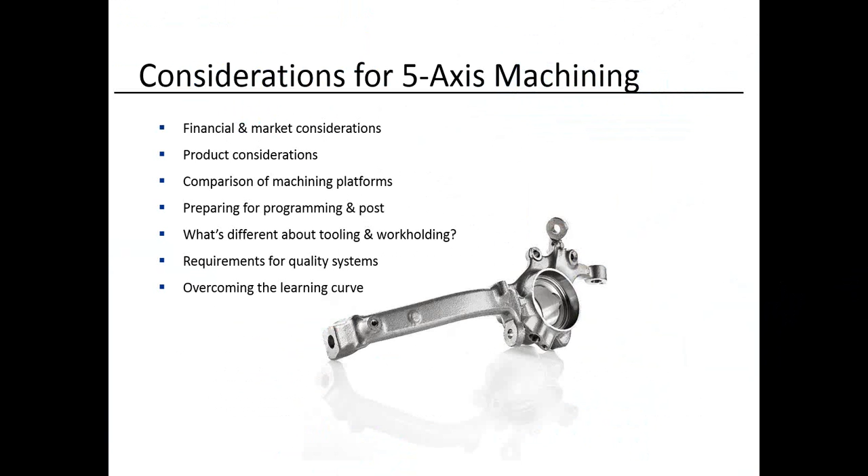Market considerations include the opportunity to diversify into a growing industry segment like aerospace and medical, with the ability to manufacture those in-demand components. Would expertise in 5-axis machining allow your shop to get more work from existing customers, find new customers in the same work segments, or diversify into new contract segments? The business case for investing in new technology should be carefully considered. Next slide, please.

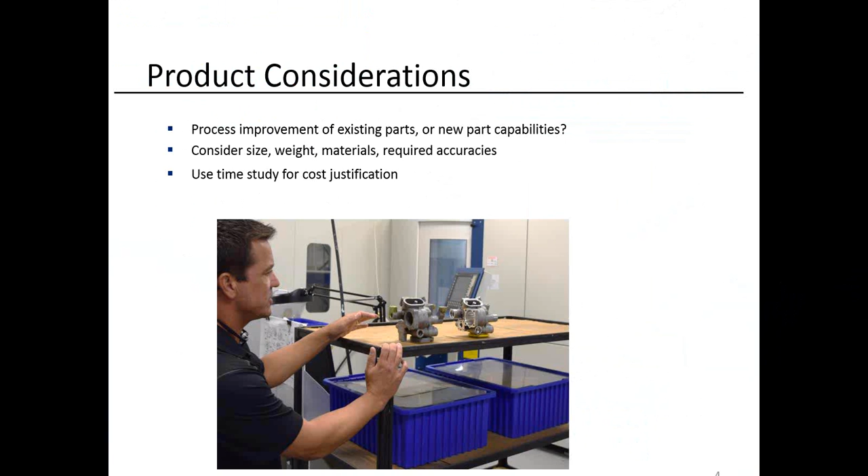These are typically the type of industries where 5-axis tends to shine. Aerospace, either rotating parts or structural parts. Gas and oil industry, we show basically as 5-axis, what you would call 3+2 work, where there may not be a lot of 5-axis sculpturing, but the complex compound angles required to manufacture these parts can really simplify the manufacture if you can do it in a 5-axis environment.

Medical, on small-end machines specifically, tends to be very complex shapes and very tight tolerances. And then, of course, automotive first and second tier. High utilization of 5-axis machines, mostly for positioning and, again, holding accuracy by reducing setups.

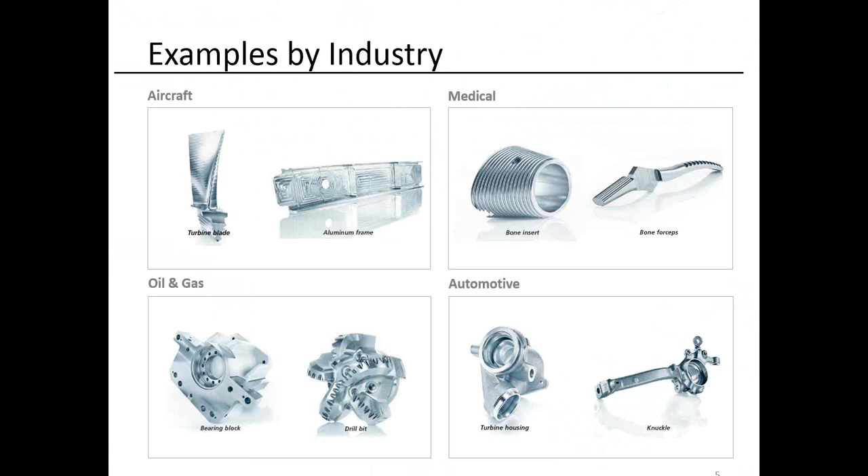Next, please. The advantages of 5-axis machine: ability to save time. Machine complex shapes in a single setup. This combines more efficient cutting and more operations in one handling of the part. Much greater machine productivity compared to multi-step setups on a typical 3-axis mill, considering how much faster it would be to drill holes on multiple compound angles without changing the position of the part in the fixture.

This translates directly to fewer labor hours, changeover costs, which all relate to overall cost savings. Improved quality. The less times you handle and refixture a part, being able to do more work off of a single datum point will increase quality. Fewer setups, improved dimensional accuracy. No human involvement, which can cause incorrect alignment or scrap parts.

The general approach to 5-axis allows the use of shorter tools. Shorter tools reduce vibration and create higher quality of surface finish. High quality surface finish can eliminate secondary process, as in hand finishing. 5-axis capability also supports new workpiece designs like undercuts, small fillet radius, and sharp edges and so on.

Reduced tooling and fixturing and material inventory. This requires a whole different view of manufacturing your parts. Many times you'd want to try to use sacrificial material where you can do more of the part than one handling and maybe snap it off at the end. Dovetail style fixturing. So it really requires an open-minded approach to how you're holding your parts and the best utilization of handling the parts. Improved production flow.

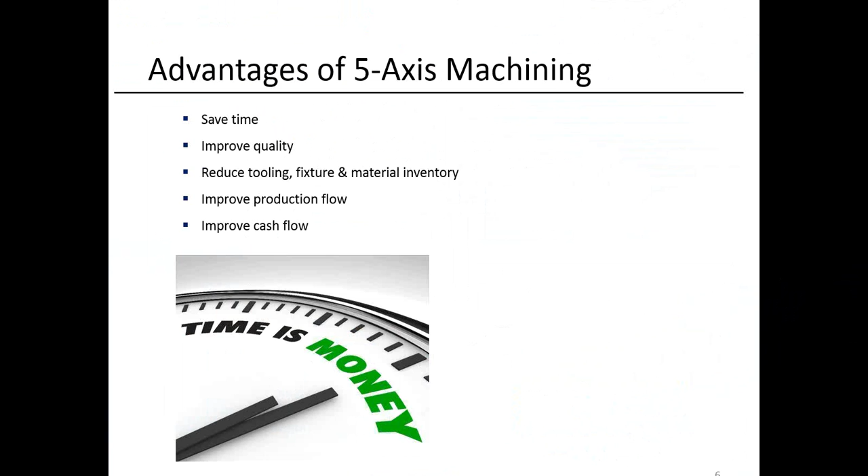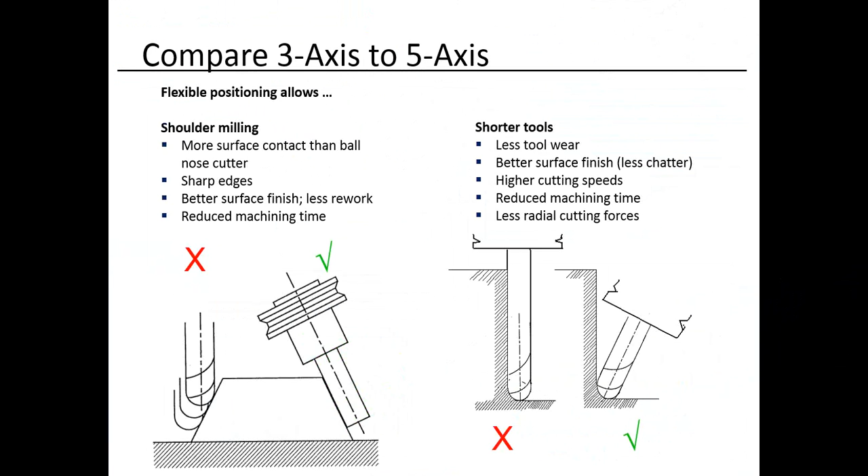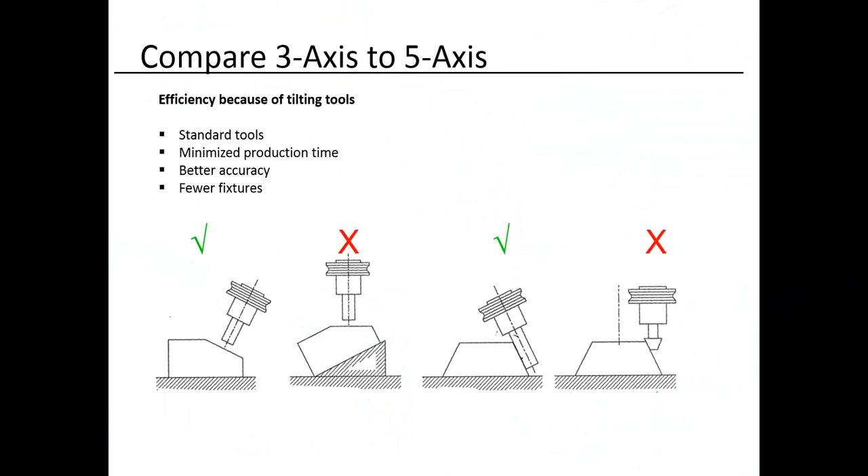Next, we're going to visit the different styles of 5-axis machine that you may run across. Typically, they break down into 3 styles. We have the forked head machine, which is going to take your 4th and 5th axis into the spindle itself. This type of machine normally can accept the most weight on the pallet. Probably one of the big advantages. No weight limitation whatsoever since you're running with basically a flat table. All of your joint work happens in the tool.

One big concern with this type of machine is you're typically going to look at a machine that has 2 to 3 times the stroke of your largest work part. If you consider the orientation of the tool, if you want to do side work, you have to account for the length of the spindle and the length of your cutting tool, both to the left, the right, the front, and back of the part. So again, this typically requires a lot of stroke. The more stroke you have for any given part size will tend to go against accuracy.

You won't have as much weight as the fork head example, but it's going to be more weight than a double table. Again, a lot of axis motion for potentially a very small part would be the downside to this configuration.

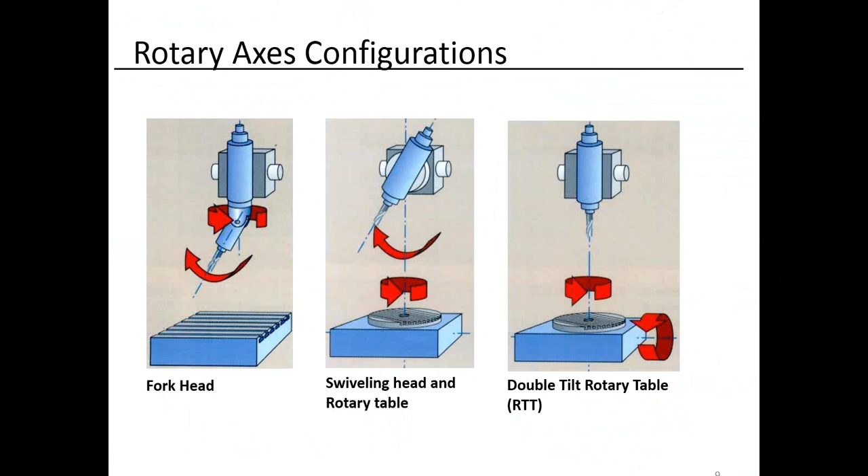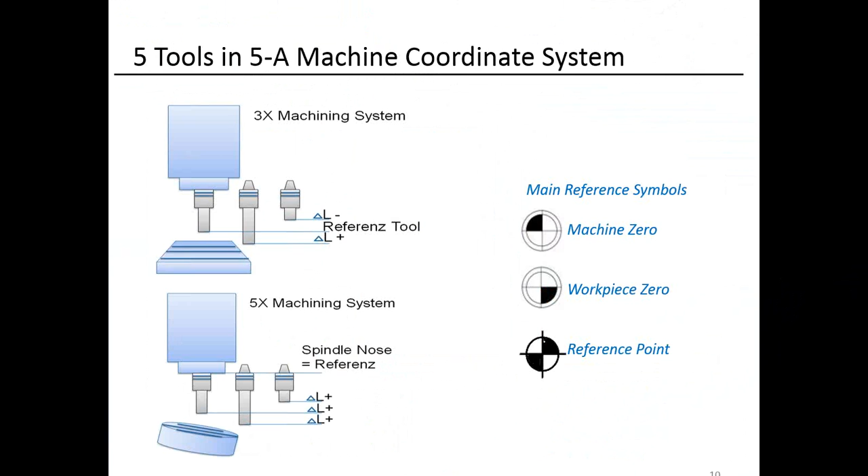And here's an example of how that translates. The machine is always tracking the MCS, which is the machine coordinate system. This is basically the cutting tool to the center of rotation of the machine. From there, we translate the machine center of rotation to your workpiece part 0.

Any 5-axis machine you look at will have the capability to process this internally. So we're not dealing with a lot of math here, especially in a 3+2 application. You can simply program from your datum 0 on your part print and let the machine's CNC control do the calculations to bring it back in. But again, keep in mind the machine center of rotation to the workpiece 0 is a very critical setting which normally is overlooked in a 3 or possibly even 4-axis scenario.

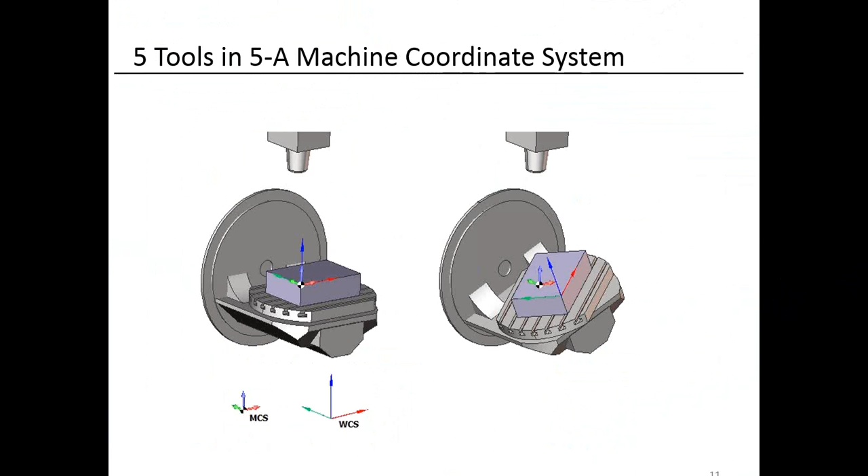Gisbert, you want to take this one? Yes. So, good afternoon, everybody. Now it's afternoon everywhere, I guess, except California.

I want to talk a little bit about the terms and information you will receive when you talk to your operator, or when you talk to somebody who's in the 5-axis machining business, when we talk about kinematics. And these kinematics are very important, as Bill pointed out, in order to make sure that your machine machines the part accurately, and you need to know the terms of the different axes, because now you're not only dealing with X, Y, and Z, now you're dealing with additional axes.

And there's a certain norm established when you're talking about different axes. The C axis goes around Z, the B axis turns around the Y axis, and the A goes around the X axis. So if you talk to somebody when you want to turn the part or you rotate the part, you know exactly what you're talking about.

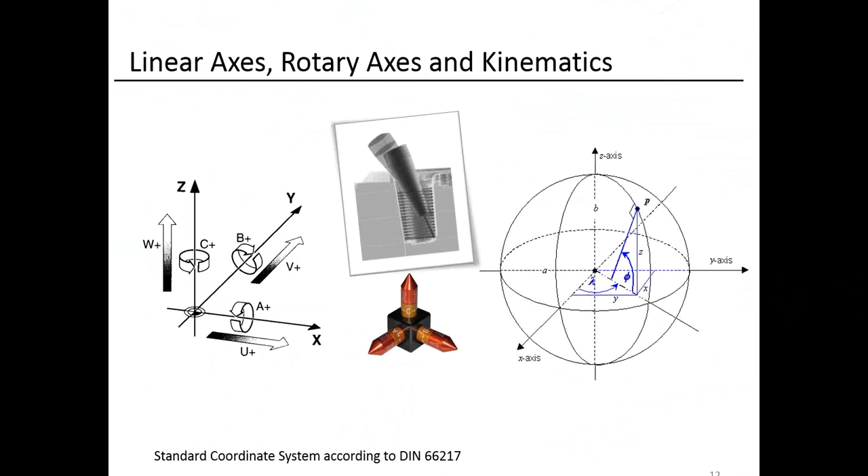And again, it's very critical that your kinematics of the machine are established. So when you reference your rotary table in relation to the Z, X, and Y axis, the machine needs to be calibrated so when you run your program the machine tilts in the correct fashion so you maintain the accuracy to your zero wherever you decided that's going to be. There are different types of machines. We'll give you some abstracts on the different types of tables here.

Also, on the efficiency side, make sure that your tool changer is very closely mounted to the work area. That also means when you laser your tool in relation to the table and to your Z-axis, you want to make sure that that laser measuring device is as close as possible to the axis so you maintain maximum accuracy of your tool and your kinematic.

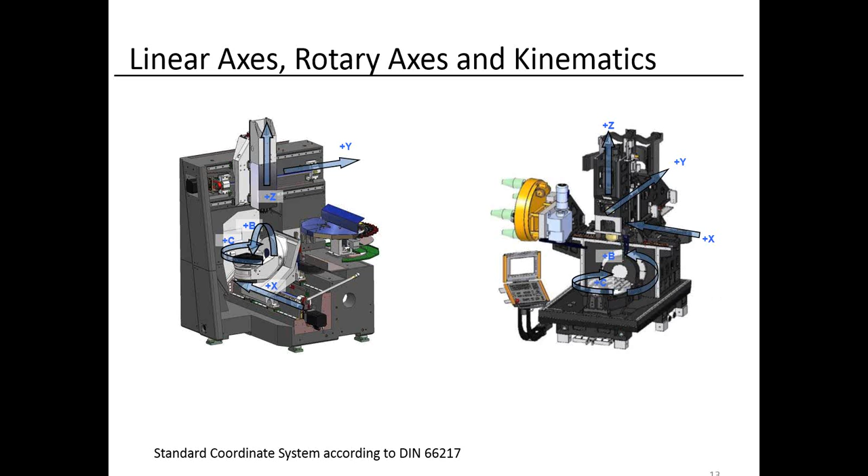What is basically giving you similar features. Obviously, the machine is maybe not as dynamic because it's going to handle bigger parts, but you have, again, the same orientation of the axes and the table there.

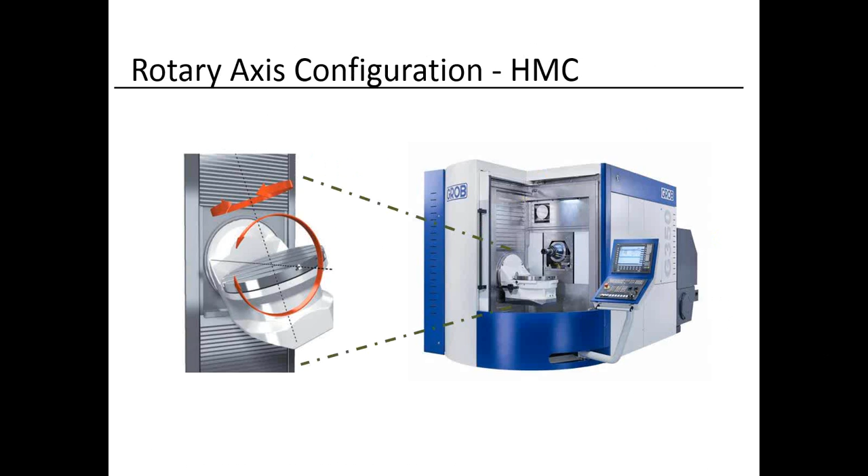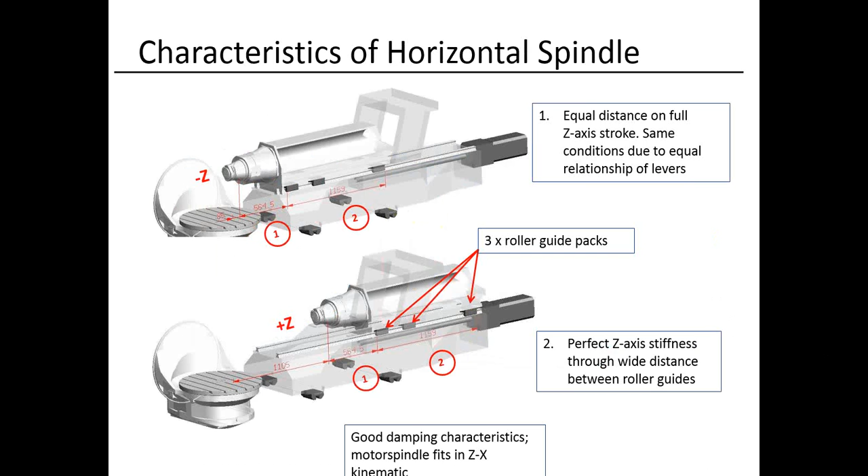Another advantage we feel with the horizontal spindle, from the center of the pallet gauge line, which is the top representation, to the full retract of the gauge line of the spindle, the distance from the front bearing pack to the spindle gauge line remains the same. We're not giving up any rigidity as we get closer to the part. Next slide, please.

On a vertical spindle machine, typically you're going to have a ram type scenario, something to really consider if you're dealing with very small parts. When you're fully retracted, you notice we have an extension of 215 millimeters from the bearing pack to the gauge line of the spindle, but as we extend the spindle closer to the pallet, that dimension is now 715 millimeters. So we end up with a little bit more of a leverage effect, and also you notice the spindle is always in the work zone.

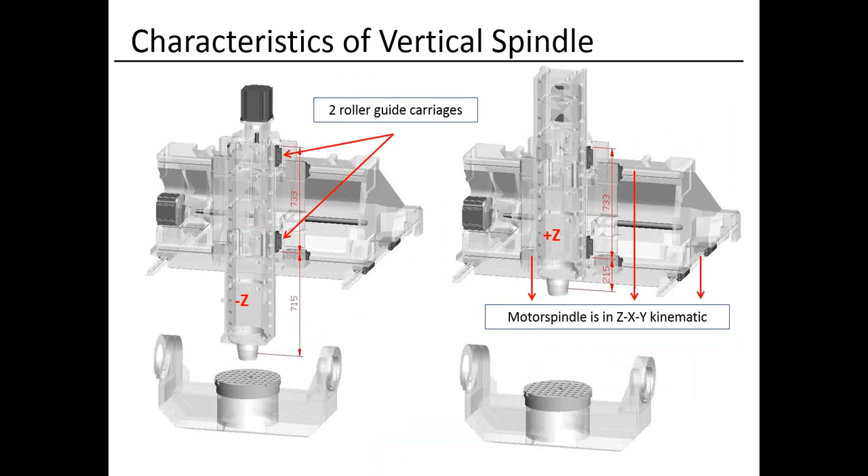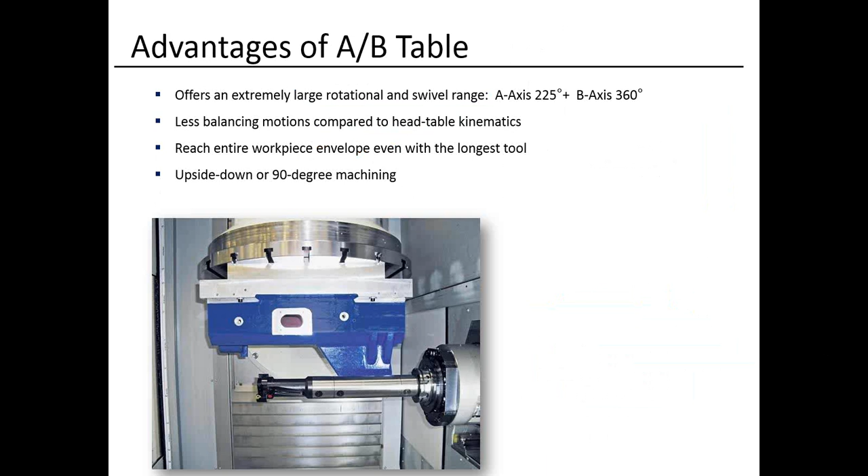So again, as you put a longer tool in a spindle, it's getting into your maximum size part, being able to cut within the pallet. Just an example of the long tool, big work envelope. With the ability to retract the spindle completely out of the work zone, we can do a part that's pretty much the full size of the pallet, access all sides of the part, and not have to worry too much about interference. Okay.

So now we're going a little bit away from the machine, and we want to educate you a little bit about the whole process and some terms you will find, and most of you probably already know these terms, but I want to bring them up because you might deal with some engineers who are not so familiar with the manufacturing process. And I think it's very critical when you go from 3-axis to 5-axis that you take certain things into consideration.

Then your CAD data, computer-aided design, and then your CAM data. So that's more where you program your machine, where you set the tool paths. You want to make sure that your CAM system is really up to snuff and can deal with all the specific features of the machine, the specific G codes, if that machine is using that, because not every CAM system is necessarily tuned into 5-axis, and you might not be able to take full advantage of all the features that machine offers you if you don't have a suitable CAM system. So make sure you look at the right stuff.

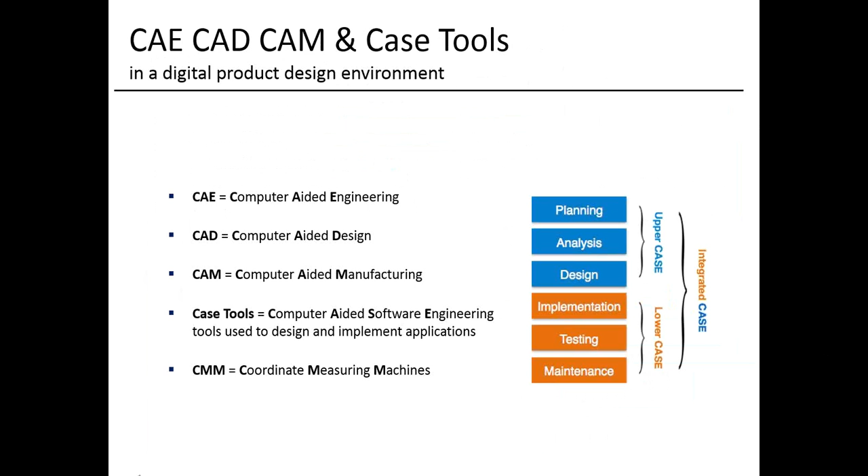Then CASE tools, computer-aided software engineering. Those are complex software systems. And then last but not least, the CMM machine. You do a test of the part where you want to inspect the part, and when you want to really do accuracy and you want to recalibrate your machine, I would say you should have something like that in your shop, or have the capability to go to somebody to utilize a CMM to calibrate the part before you go into mass production.

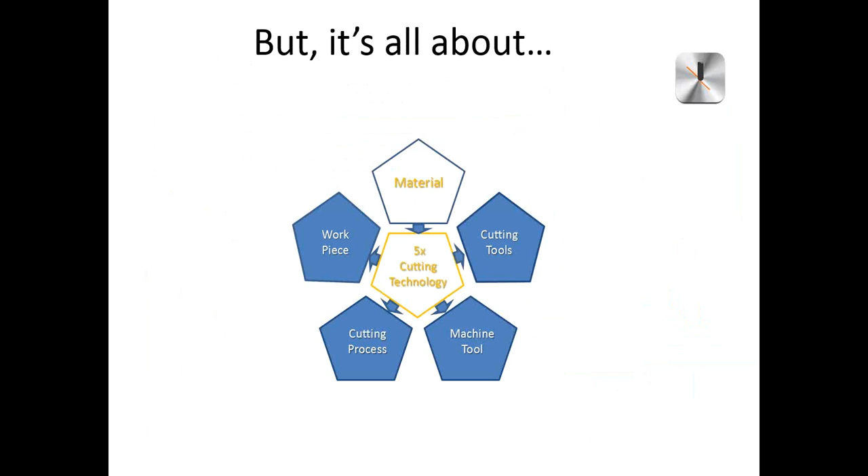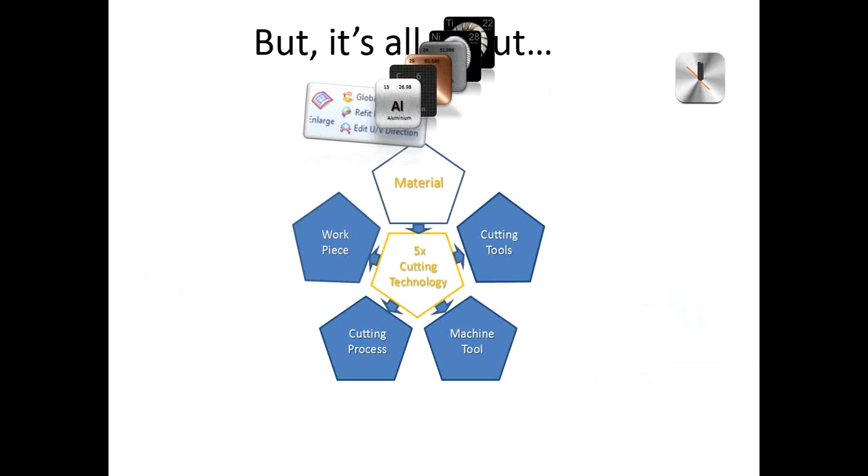And here are a couple other components you need to take into consideration when you go into the 5-axis machine. First of all, you've got to look at your material. Are we dealing with aluminum, copper, brass, graphite, whatever you machine, alloys? Make sure you take that into consideration, because it's also going to determine what type of cutting tools you're going to use. And certain cutting tools are more suited than others.

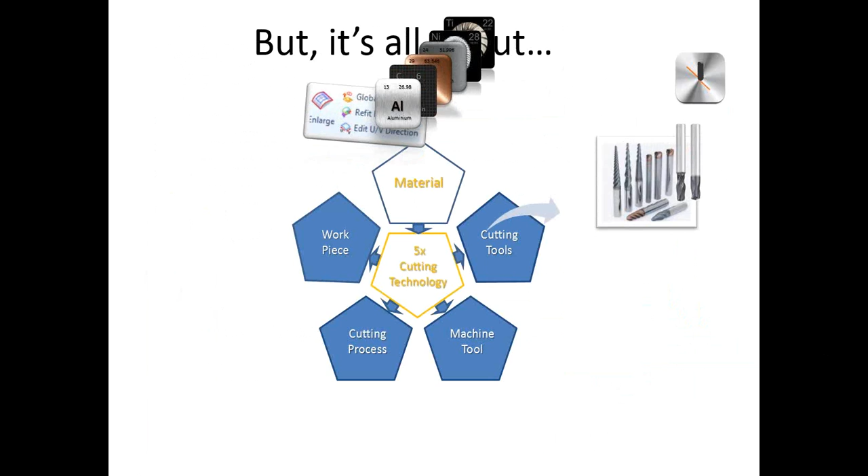Specifically, if you go into more complex 5-axis, full 5-axis applications, you can get really high performance tools, which may look a little strange to some of us in the beginning, but there's a lot of benefits to these tools when you go into the 5-axis application.

Also think about your cutting process. Make sure that when you use a CAM system, your tool path is perfectly aligned with your machine capabilities, and that your CAM system gives you the right post and the optimum tool path, because you don't want the machine doing a lot of air movement where you're not cutting any chips, you're not having the right feeds and speeds, so you wear out your tool faster and you're losing accuracy. So make sure you have a really sophisticated CAM system and a good post processor for that.

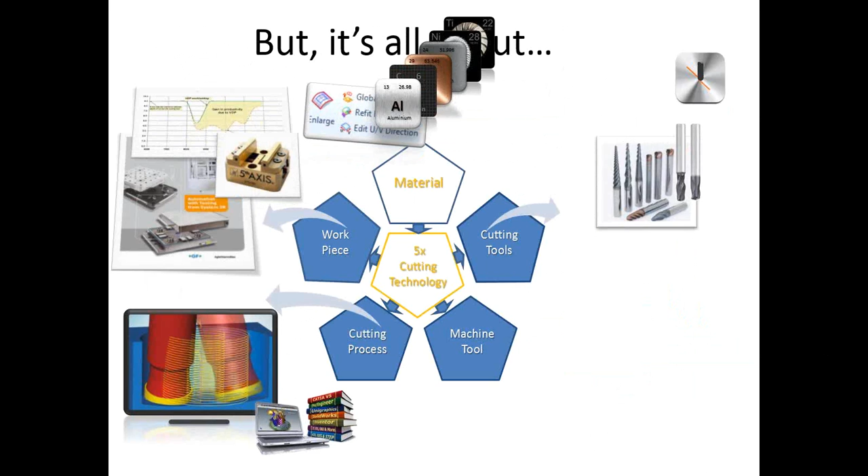And then last but not least, not really last, but the workpiece holding. Take that really into consideration. How are you going to hold your piece? Specifically, if you want to do 5-sided machining, you want to hold the part in a certain area which is maybe not critical to the accuracy. So you have like a dovetail application where you can really get as close as possible to your surface finish to maintain the accuracy and hold the part very solid in these 5-axis motions. Or you have to go to a vise, but then you need more material to reach all 5 sides.

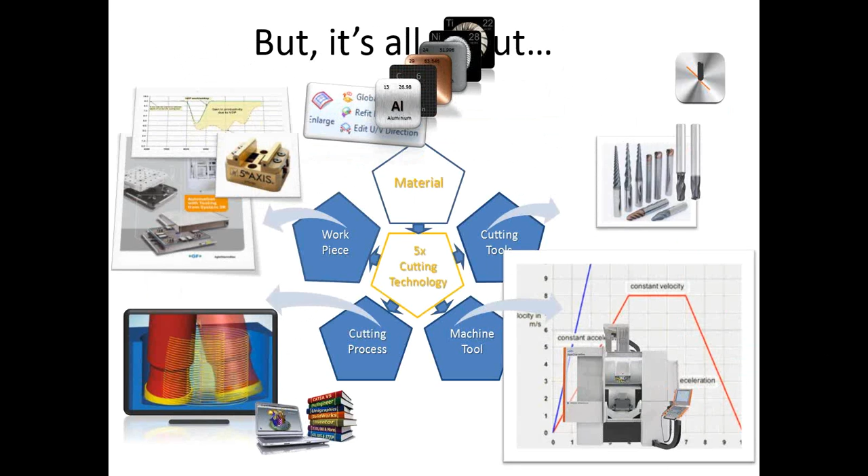And then one critical component is certainly your machine tool. Consider what type of work you do. Are you looking for smaller parts, bigger parts? You want to get better surface finishes. You want to have high accuracies. That certainly plays into your consideration of your machine tool. You need to make sure that you have vibration damping capabilities on the machine, that your temperature is stable so that the machine is not growing or shrinking on you depending on the temperature changes within your shop, so you can benefit from the full 5-axis and the accuracy of a 5-axis application.

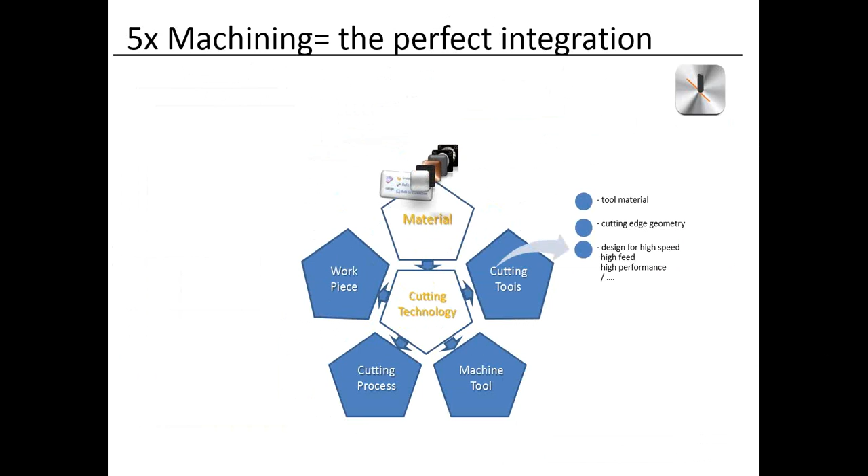So the perfect integration, really, we talked about the material a little bit. Think about your tool material, what your cutting edge geometry should be on your cutting tool, and then also design for high speed and high feed and high performance. Depending on what you do there, you might use solid carbide tools, you might use insert tools when you want to remove more material. If you want to get good surface finishes, good accuracies, you might want to have a minimum chip load on your cutting tools, so using carbide tools for high-speed applications to achieve that.

Machine base, it should be a robust construction. You've got to also consider, specifically when you get into high-speed applications, let's say more than 30,000 RPM spindle speed, if that cutting tool breaks, you better have a good cabinet around it so that your operator doesn't get hurt. So you've got to look at the entire product also on safety. It's a big concern here because when things are moving around, make sure that everything is closed. It's a closed cabin so that these tools don't fly through the shop and kill somebody or hurt somebody.

The CNC control is also very critical. If your CNC is not going to keep up with the 5-axis data, because you're dealing with much more data now, your machine will not be able to keep up with the load of data that goes to the machine. The machine will slow down. It even stops to a certain degree, which could break your tool, and you could get marks on your part, and certainly you lose accuracy and surface finishes. We talked about tool clamping and coolant management. Also think about that.

Specifically, if you have a 5-axis part and you turn that part in different directions, you want to make sure that your coolant can go there so you can cool your workpiece and your cutting tool, and make sure that machine allows you to do that, coolant through the spindle. Maybe when you drill deep holes in 5-sided applications, you want to make sure you have enough pressure to get the chips out of those holes.

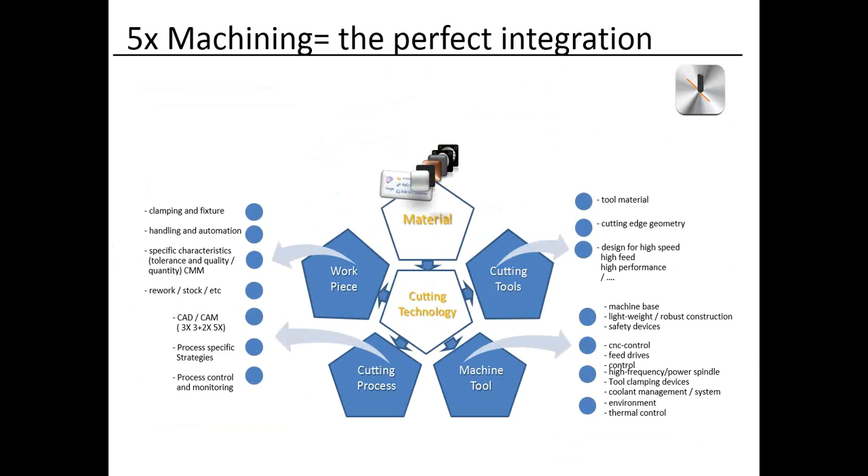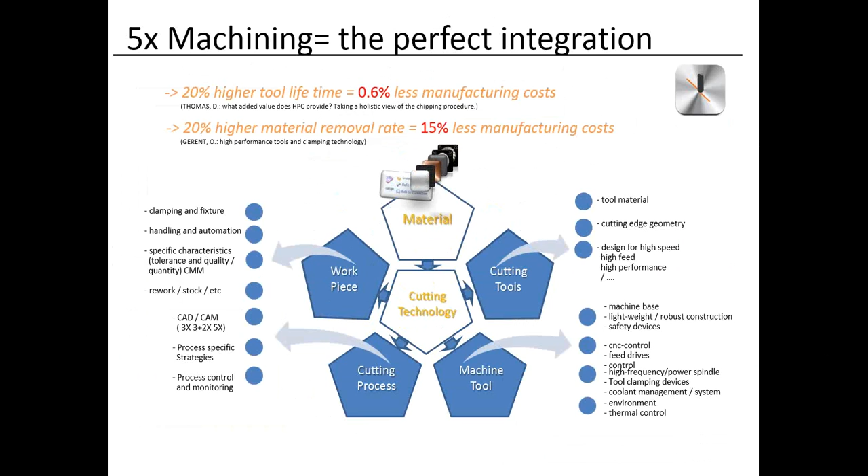So if you do all this and you take all this into consideration, what we found over the years is that you can at least get a 20% higher tool life, which turns into 0.6% less manufacturing cost, and you can get up to 20% higher material removal rates, which decreases your manufacturing cost by 15%.

So Bill, you going to come back on this?

Training should include solid models, creating the tool path, and simulations. Simulations may be the most critical piece of the puzzle. In a 3-axis and a 4-axis world, it's not too hard to visualize where the cutting tool and where the tool holder is going to end up in relation to your work part. In a true 5-axis world, it can get a little bit abstract, and you may bang into holders and things that you wouldn't expect. The simulation software is a worthwhile investment that can save you lots of time, money, and potential crashes.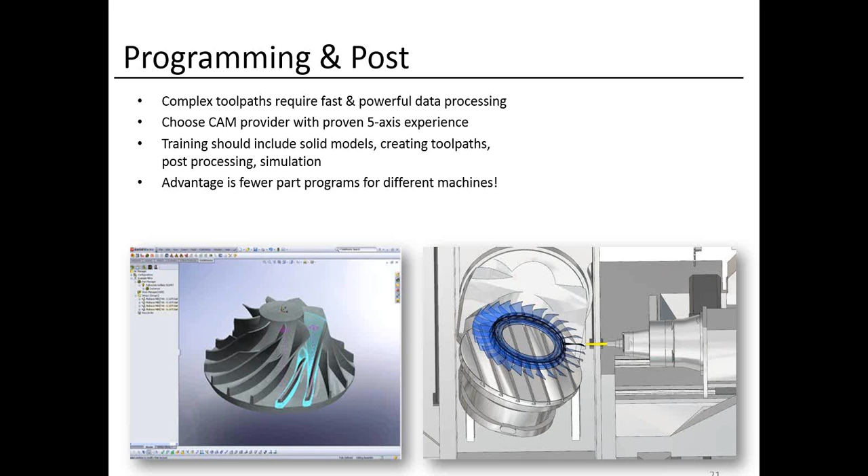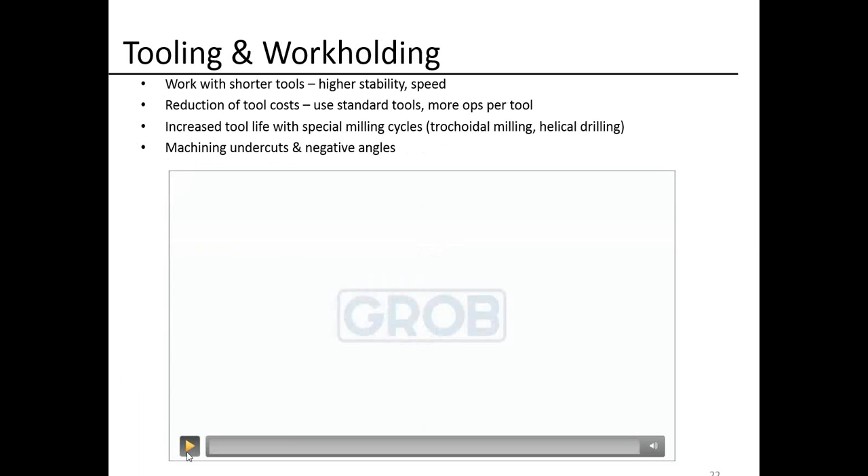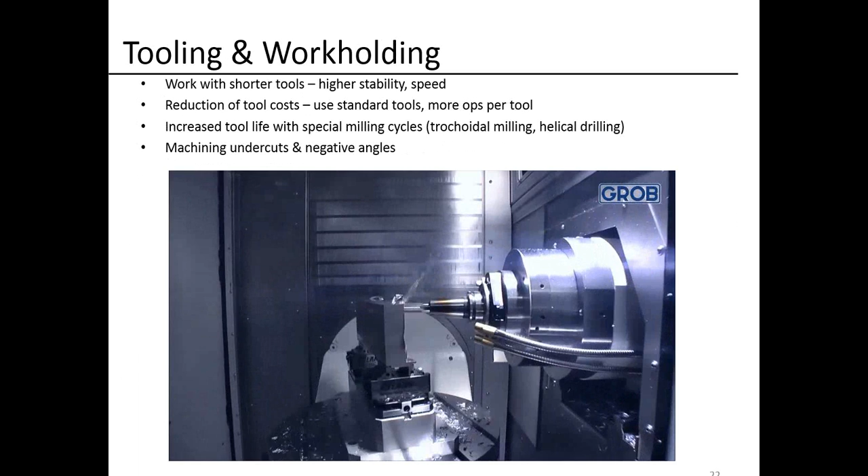Next. Here we just have a little video giving you an example of the kinematics of the machine, different angles you can approach the part from. As you're watching this, keep in mind, this is where you want to start opening your mind to the way you hold your part and the way you attack your part. This piece can obviously be made on a vertical machining center in multiple handlings. The ability to effectively complete this piece in one operation with the snap-off tab on the bottom is the key to success in the 5-axis world.

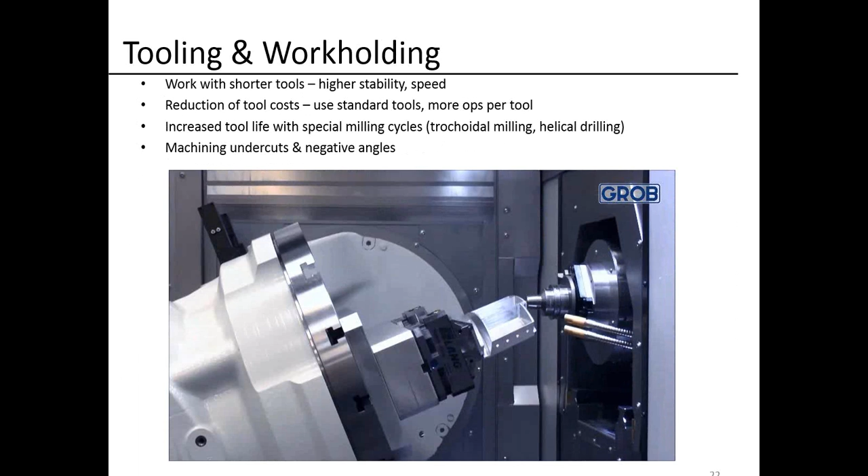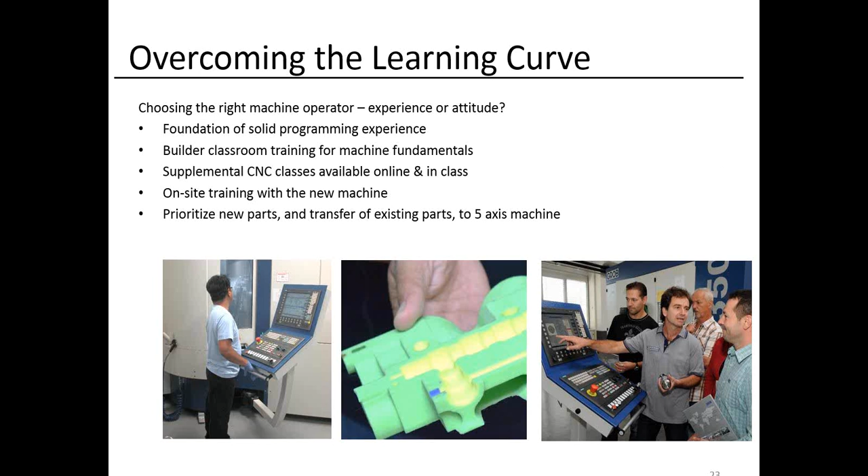Gisbert? So, really coming almost to the end here, and I think we want to summarize a little bit about the 5-axis technology you should take into consideration. Look at your customer. Look at the customer's needs and manage his requirement. Maybe you can help him to look at a different approach, how he makes his part. Maybe you can give him new ideas how you could machine a part a certain way, utilizing the 5-axis, what makes it easier for you to hold the part. Maybe you can save some material.

If you can help him with the product development, give him some ideas, be a partner with him, differentiate yourself from your competitor. Somebody with a 3-axis machine will not be able to do certain things. If you can help this customer to develop a certain product a certain way, maybe the only way to do that is with 5-axis, and then he is almost forced to come to you to machine that part, because you're helping him to be more efficient to make a part.

Integrate the process design. Also take into consideration what cutting tools you can use, how you are going to program this part, what is the best way to hold the part so you don't create vibration in the part because your tools are too long or too short. Also manage the cost from the start. Look at what are the best cutting tools you should use for this. Is it really always necessary to go with expensive insert tools, or is it better to go with solid carbide tools in certain applications to be more effective, more efficient and accurate without doing additional operations on that part?

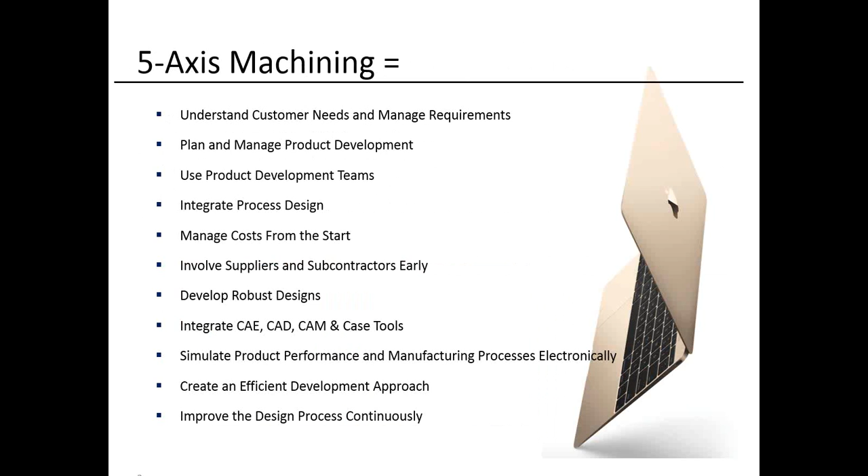Be creative. Think outside the box. Don't go with your old-fashioned, I'm going to hold this thing in a vise and I'm going to clamp it another way and I drill from this side and I put it on that machine. Think outside the box. Be creative. Say, I just want to hold this part in one location and I want to reach it everywhere and I want to finish the entire part when it comes off the machine. I just have to finish one side, and think about that.

Bottom line, the trend towards multi-axis machining will continue to grow due to the clear advantages. Companies benefit from less competition. Not every shop can produce complex and sophisticated parts. Parts that have fewer competitors are able to deliver higher value. This is the trend we see over the last few years in manufacturing. Eliminating your competition, improving accuracy with less labor input for handling parts, and the ability to machine more complex geometries to a much tighter accuracy.